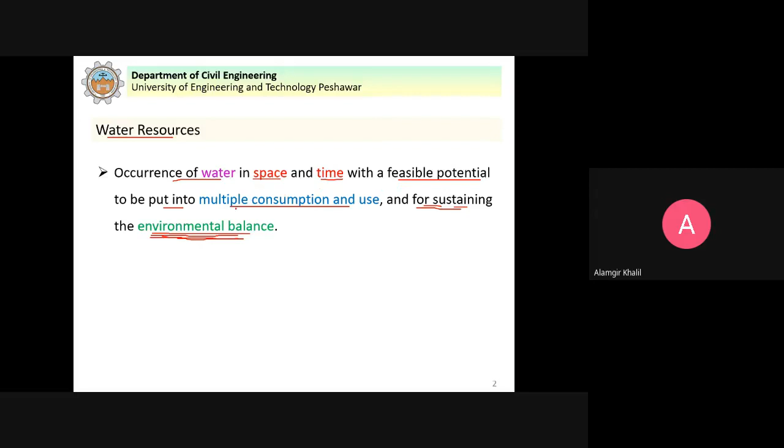So water occurs in space and time with a feasible potential to be put into multiple consumption and use, and for sustaining the environmental balance.

Water is a single resource, as you can see that it is abundantly available on the surface of Earth. It has no substitute.

Water is a limited resource. Here we talk about the freshwater availability, because we have plenty of water available in oceans, but we cannot use them. For example, directly we cannot use them for drinking purposes because of the salts present in it. So we are more dependent on water in lakes or in rivers. So water is a limited resource.

Accessibility - how many people have access to fresh water? As you already know, civilizations have nourished along the banks of rivers, because water is life and we are using water for different purposes. So if we do not have a direct source of water available, then we have to bring the water from a source to the community.

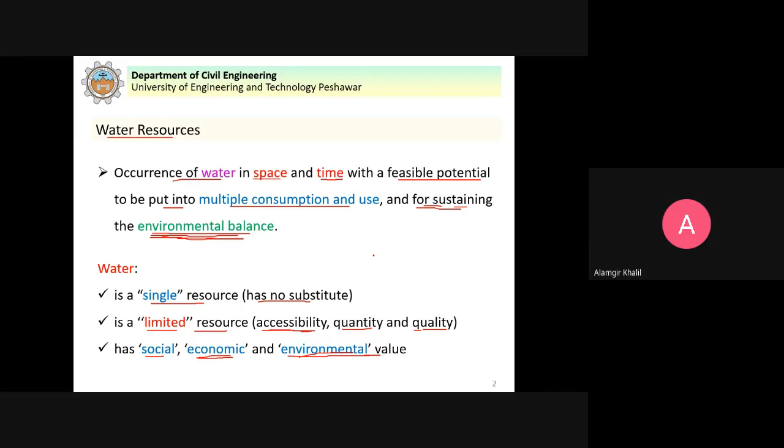A unique resource: every organism, individual, and ecosystem on the planet depends on water for survival. Water impacts all aspects of life on the planet.

Poor water management and water shortages can lead to disease. If we have water shortages, definitely we cannot survive without water. Or if we have poor water management, for example, water stays in an area, it can lead to causing diseases because it will become a breeding place for flies and mosquitoes.

Similarly, if we have water shortages, it can result into malnutrition - not sufficient diet that is necessary for health will be available, because if we have water shortage, we cannot grow more crops and cannot meet the food requirements of the population. It can also result into reduced economic growth.

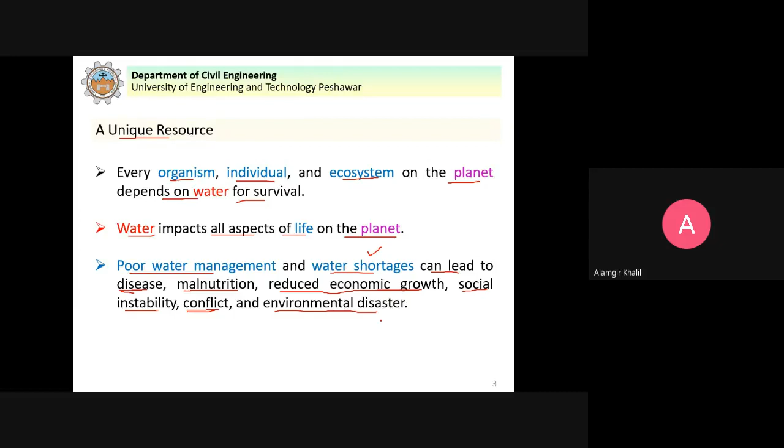Water resources - there are three resources of water. The first one is rain, which supplies water directly to any area on the surface of the earth. The second source is the surface water - the water flowing in rivers and the natural lakes that we have, or the dams and reservoirs that we build. That can be a source of surface water.

And we have groundwater. So the surface water occurs above the surface of the earth, and the groundwater occurs below the surface of the earth. But the groundwater is not directly available for use, we have to pump it in order to use the water. So it means we have three sources of water available to us: the rainfall that directly supplies water to any area, the surface water which is in the form of lakes and rivers, and the groundwater which occurs in aquifers below the surface of the earth.

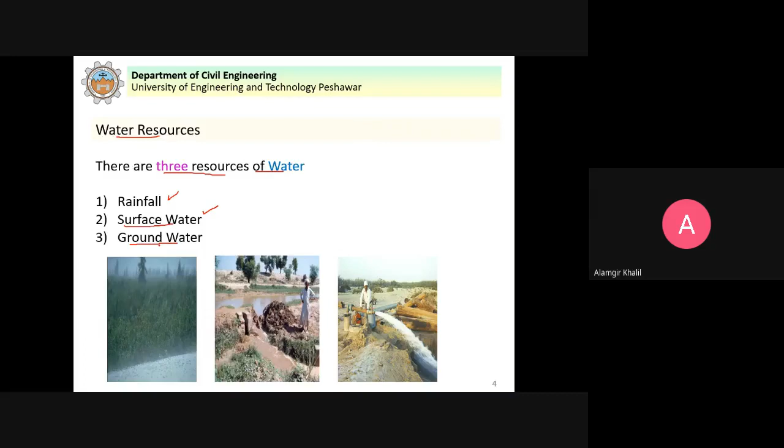Next, we have this hydrological cycle. You have studied this in detail in your hydrology course. So in the hydrological cycle, as you can see, the water moves in a cycle. This starts from the ocean, driven by energy from the sun. So we have evaporation, because oceans cover a great portion of the earth, and due to the energy from the sun, evaporation takes place.

And you already know that as the water vapor moves up, cooling takes place and it results in cloud formation, and then the clouds move inland, and the same clouds can result in rainfall, or we have precipitation. Precipitation is a general term that includes rainfall as well as snow on the mountains. Now this rainfall which occurs on the surface of the earth, some portion is absorbed by the plants and trees. So we have evapotranspiration - evaporation plus transpiration. Evaporation from the adjacent soil and transpiration from the plant leaves. Collectively this is known as evapotranspiration, and the water is again transported to the atmosphere.

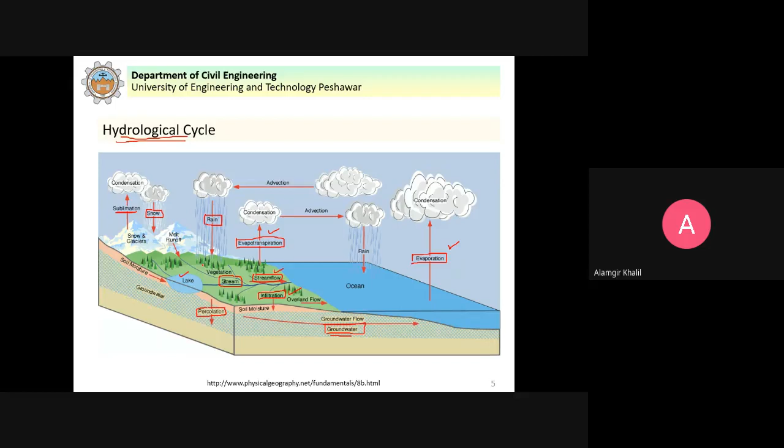When rainfall occurs over an area, how we can measure the rainfall. If any rainfall is missing, how we can determine the areal distribution, how we can calculate the missing rainfall in an area, and so on. So the hydrologic cycle is actually made up of a series of complex processes and storages.

Now the global view for occurrence of water: you can see that of the total global water, around 97% is in oceans. So 97% of the total water available on earth is in oceans, and we cannot use it directly for drinking purposes.

So out of that, the fresh water that is available is only 2.5% according to this source. This 2.5% fresh water is what we are dependent on for different uses: domestic water supply, industrial water supply, agriculture, food production, and hydropower generation. We are dependent on this fresh water, 2.5%.

And out of this 2.5% fresh water that is available to us, around 69% is in glaciers and 30% is below the surface of the earth. If we make this 2.5% as 100%, so out of that around 69% is in glaciers and 30% is groundwater. So we are left with just 1.2% of this fresh water available.

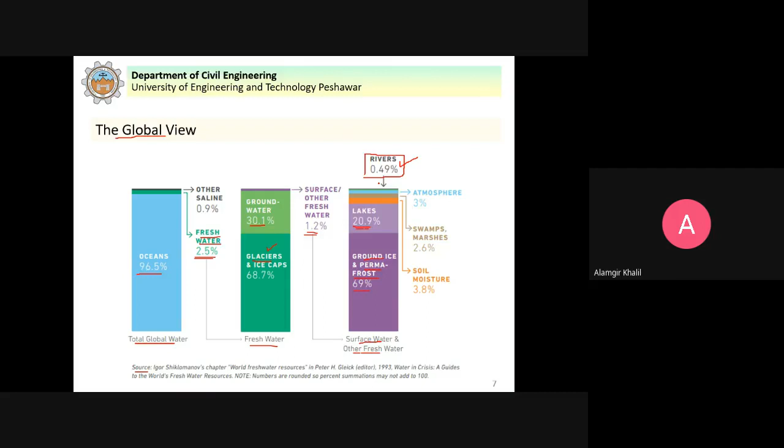So you can see the quantity of water that is available to us. The fresh water, 2.5% available. We have frozen, that is around 69%. Groundwater is around 31%. And the surface fresh water that is available is 1.2% according to this source. The figures can slightly vary depending on the different sources, but this is how you can visualize the availability of water.

So you can see how much water, that is actually the fresh water that is available to us for different uses. A greater portion is frozen ice, and around 31% is groundwater, which is not directly available—you have to pump it. So this is the water that is available to us in the form of soil moisture and the lakes and the rivers.

So you can see that the fresh water available to us is in the form of aquifers, rainfall, natural lakes, reservoirs, and rivers. Then we talk about the rivers in Pakistan, the Indus River, which is the lifeblood of agriculture, and agriculture is the backbone of the economy of Pakistan. You can see globally how much quantity of water is available to us in the rivers.

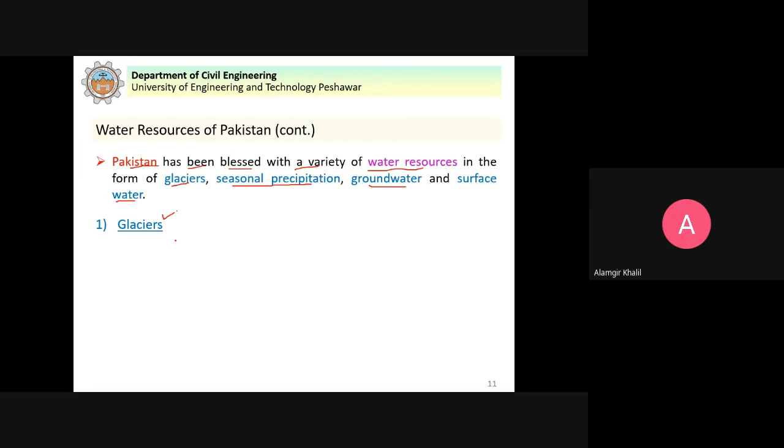So the glaciers here supply the water, the source of water for the Indus River and its tributaries. And the Indus River is very important in the context of Pakistan - the whole country actually depends on this Indus River and its tributaries.

The glaciers carry great significance in the flow volume and timing of the Indus River and its tributaries. Why do the glaciers carry great significance? Because during summertime, when temperatures are high, these glaciers melt, and that's why the rivers carry more water during the summertime. So you can see these glaciers have significance on the flow volume and timing. During summer, the flow volume is more in the Indus River and tributaries because of the melting of the glaciers due to high temperatures. But during wintertime, when temperatures are low, the glacier melting is slow, and that's why the flow volume is reduced in the Indus River.

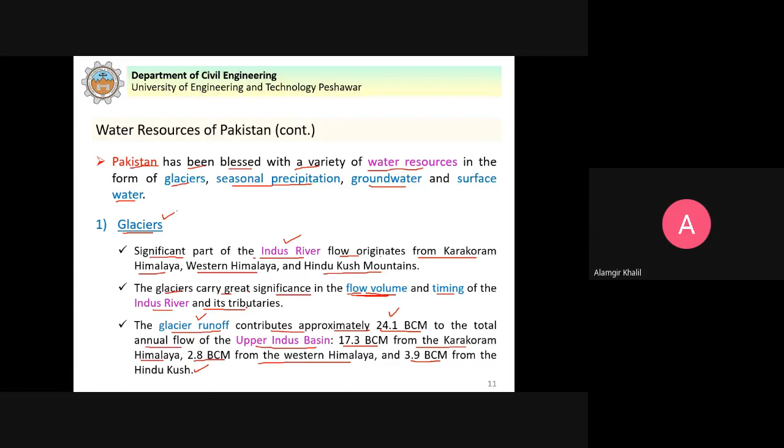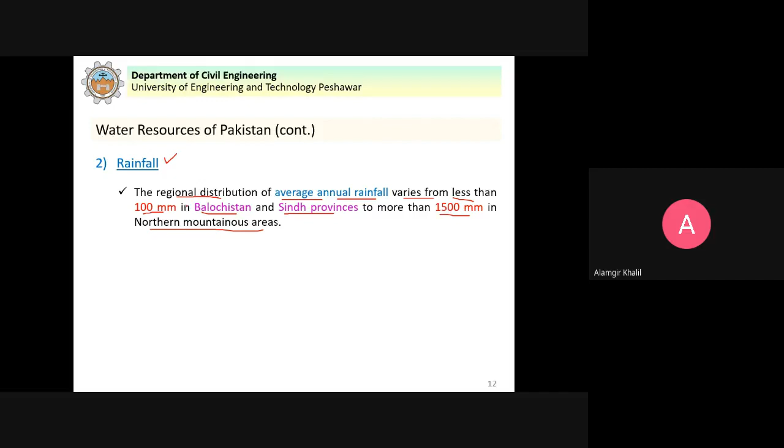About 70% of annual rainfall is received during the monsoon period, that is the months of July and August. So you can see that in Pakistan, 70% of the rainfall occurs during the monsoon period. So in other months, we have to use the water from the rivers or groundwater for different demands.

Now we talk about agriculture. During the Rabi season, which runs from October to March, the winter season, it is less than 50 millimeter in parts of Sindh and more than 500 millimeter in Khyber Pakhtunkhwa provinces. So it means that rainfall alone is not sufficient to grow crops.

This is the point to understand here, why we need irrigation. If we have enough rainfall over an area where we grow crops, and that rainfall also occurs at the required times when the crops need the water, in required quantity, then this rainfall alone would be sufficient for raising the crops. Then we don't need irrigation, we don't need artificial supply of water for growth of crops. So this is the reason why we need irrigation, and we have irrigation engineering.

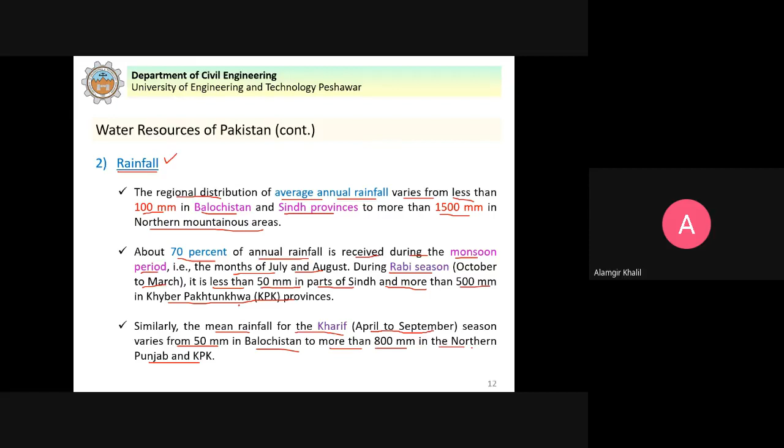The extreme changing pattern of rainfall results in large variations in flows during the Rabi and Kharif seasons. Because we grow different crops during the Rabi and Kharif season, during summer and winter season, you can see that because of the changing pattern of rainfall, we have large variations in flows during the two seasons.

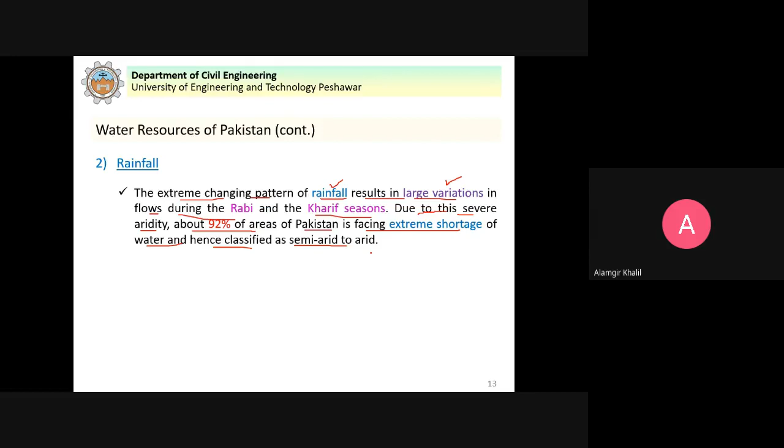Due to this severe aridity, about 92% of areas of Pakistan are facing extreme shortage of water and hence classified as semi-arid to arid. Arid land is where the rainfall is not sufficient to meet the evapotranspiration requirements. So you can see here that 92% of areas of Pakistan are classified as semi-arid to arid, meaning the rainfall, which is a source of water, is not sufficient to meet the crop water requirements alone.

About 16.5 billion cubic meter of rainwater contributes to crops in the Indus Basin irrigation system, which we will discuss in detail. This is only 13% of the average annual canal diversions. So it means that the water which we are diverting from the dams and from the rivers for crops, the rainfall that occurs in the Indus Basin irrigation system is only 13%. 13% of the crop water requirements can only be met by the rainfall.

So in order to produce more food for the population, we have to artificially supply water to the crops, and this is known as irrigation. This is why we have the need for irrigation. All these figures are from the book Applied Irrigation Engineering, published in 2017, so you can find updated figures about Pakistan.

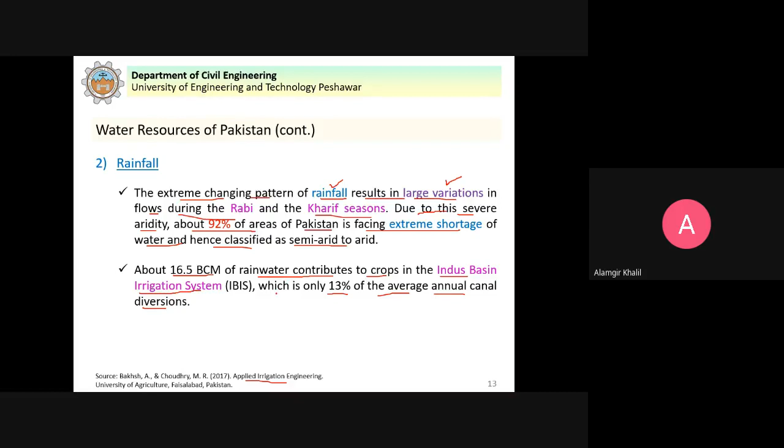The groundwater situation in Pakistan. Groundwater provides an alternative water resource for agriculture. Why? Because groundwater is not directly available if the water table is sufficiently below the root zone, so plants cannot extract water. So that is why we have to pump the groundwater to the surface and then supply it through channels to the crops.

And this is a very useful resource. It is estimated that around 33% of the world's population utilizes groundwater. So it means we cannot ignore the significance of this valuable resource.

Many countries such as Pakistan, India intensively exploit groundwater to supplement the canal water. It means that we are using groundwater as a source to supplement in addition to the canal water that we supply for agriculture.

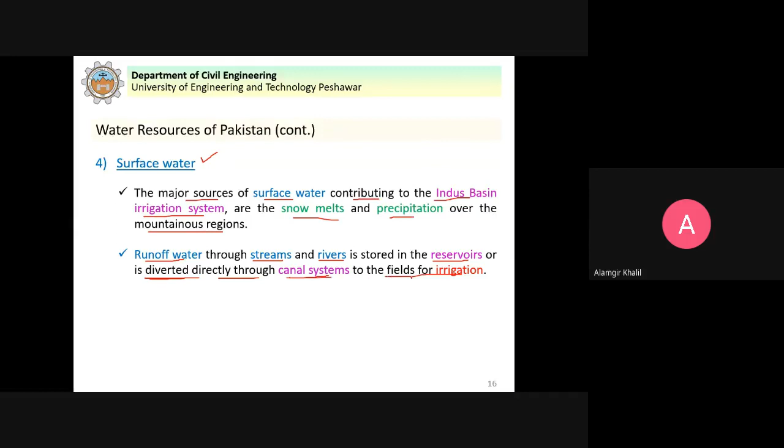Runoff water through streams and rivers is stored in the reservoirs or diverted directly through canal systems to the fields for irrigation. So this runoff water, which comes from the snow melt and precipitation over the mountainous regions through streams and rivers, is either stored in reservoirs, for example Tarbela Dam, Mangla Dam, or we have weirs and barrages that divert the water through canal systems to the agriculture fields for irrigation. Irrigation is the artificial supply of water for raising the crops.

The Indus Basin irrigation system is primarily comprised of 6 rivers, namely Indus, Jhelum, Chenab, Ravi, Sutlej, and Beas.

In Pakistan, however, the surface water resources, because of the Indus Water Treaty, which was signed in 1960 and is a water sharing treaty between India and Pakistan, Pakistan was limited to the water of the Indus, Jhelum, and Chenab rivers.

As you have already studied about the Indus Water Treaty, out of the 6 rivers, control of the 3 eastern rivers was given to India, and control of the 3 western rivers that include Indus, Jhelum, and Chenab was given to Pakistan.

So basically it means that even though we have the 6 rivers, mainly the Indus and its tributaries joining these, not all of the water in the river is available to meet their demands. That is why we have to supplement the surface water with groundwater.

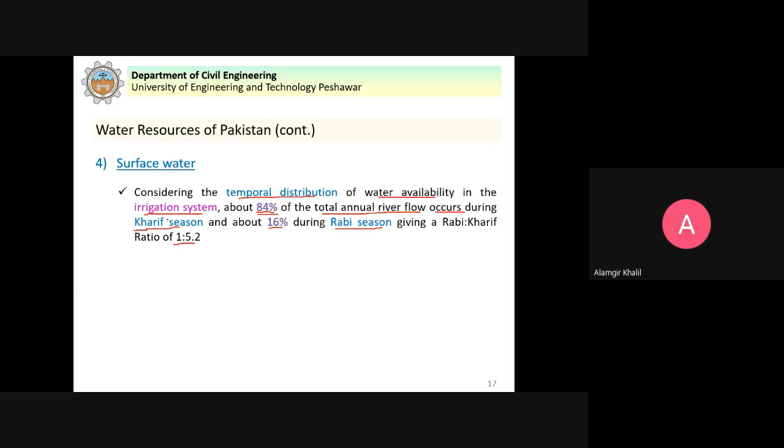So even if we have these rivers, still you can see that the temporal distribution is not equal. It means that more water is available during summer time, but less water is available during the Rabi season. So in winter, how do we meet the requirements of the crops?

So these are the reasons why we have to construct dams. In irrigation engineering, why do we study dams? So that you can store the excess water, and then the same water can be released during the Rabi season to meet the crop water requirements.

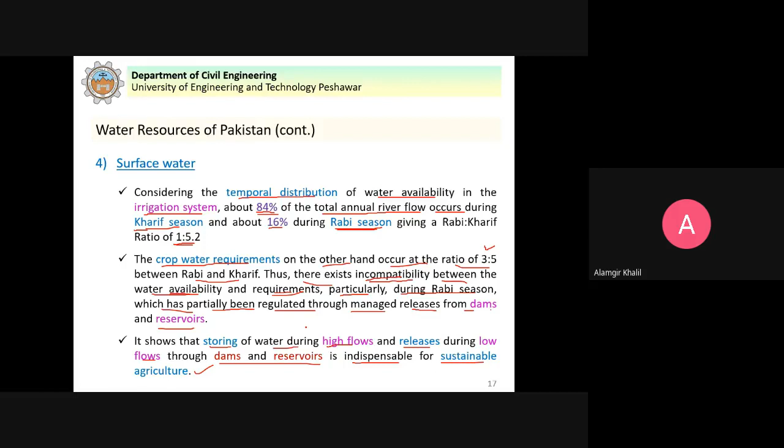And for this purpose, we have all this irrigation network, the irrigation system, and we have the Indus Basin irrigation system, which covers the entire country, a network of storages, canals, and other hydraulic structures. This is the reason why we study irrigation engineering.

Next, we briefly talk about the Indus Water Treaty. As you already know, the water which flows in these rivers flows through different countries, meaning these are transboundary rivers. So in Pakistan, we have transboundary rivers. For example, the rivers which flow into Pakistan actually originate in India.

And with the increase in population, we need more water to grow crops and more water for industries and water supply, drinking, cooking, washing purposes. Consequently, it will lead to conflict.

And this happened in our case, in the subcontinent. In 1948, India stopped the water from the rivers entering into Pakistan, and the two countries were on the verge of a water war. So after almost a decade of negotiations, finally a treaty was signed in 1960, known as the Indus Water Treaty.

This treaty gives India and Pakistan the rights to use the water of the 6 rivers. This is actually a water sharing treaty between the two countries. The Indus Water Treaty is a water distribution treaty between India and Pakistan.

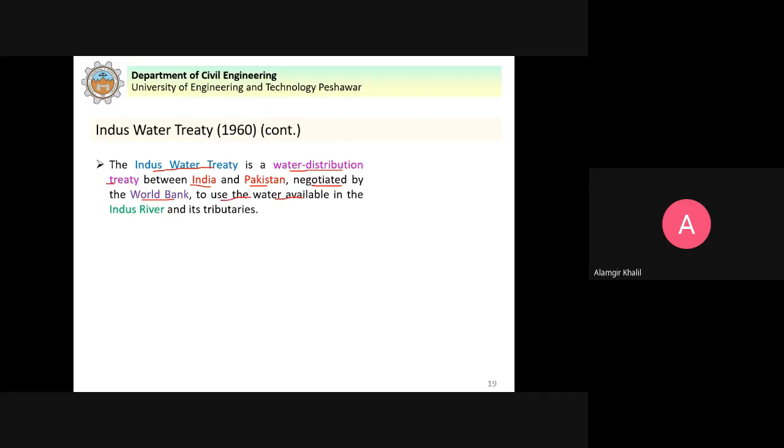Negotiated by the World Bank to use the water available in the Indus River and its tributaries, the Indus Water Treaty was signed in Karachi on September 19, 1960, by the Indian Prime Minister and the President of Pakistan. This treaty divided the use of the rivers between the two countries.

The treaty gives control over the waters of the three eastern rivers, that is the Beas, Ravi and Sutlej, to India, while control over the waters of the three western rivers, Indus, Chenab and Jhelum, to Pakistan.

So because India has to use extensively the water from these three eastern rivers, there was a threat to agriculture and other water demands in Pakistan.

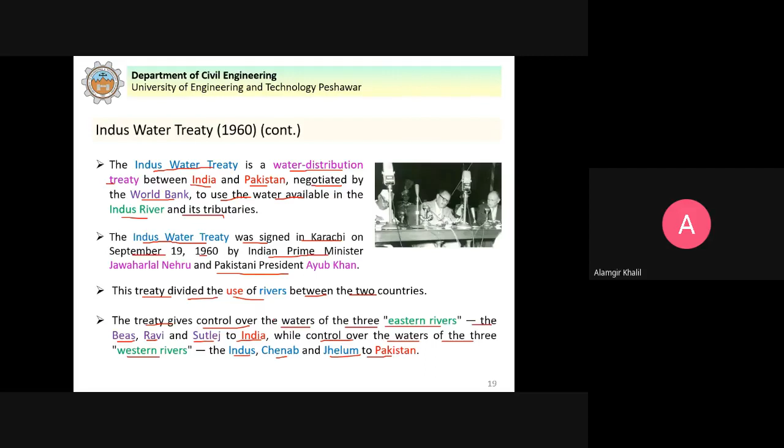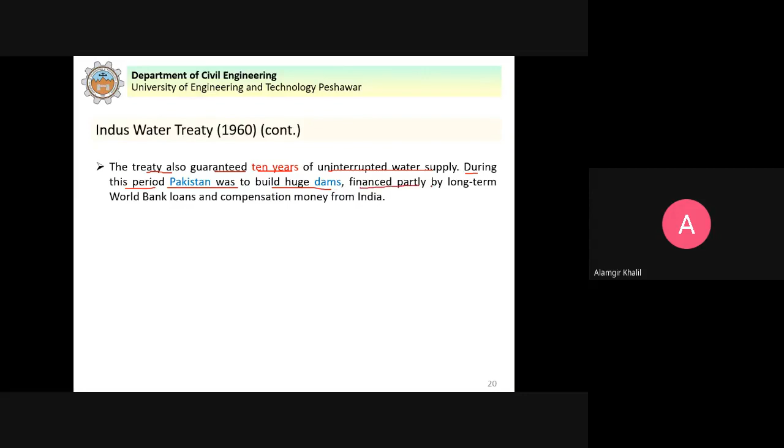So under this treaty, this also guaranteed 10 years of uninterrupted water supply. So Pakistan got 10 years to develop infrastructure to meet the shortages because of division of water usage between the two countries. During this period, Pakistan was to build huge dams, financed partly by the long-term World Bank loan and compensation money from India, because India has the full right to stop the water of the three eastern rivers.

So three multi-purpose dams, Warsak, Mangla and Tarbela, were built. A system of 8 link canals was also built, and the remodeling of existing canals was carried out.

So we have 8 link canals. Link canal means it is linking two rivers. For example, you want to divert the river water to another river, that is done through these link canals. Because India has full control over the water of some of the rivers, in order to compensate, we have these link canals that can supply water from one river to another if we need more water in the river to meet demands.

Five barrages and a gated siphon were also constructed under this treaty.

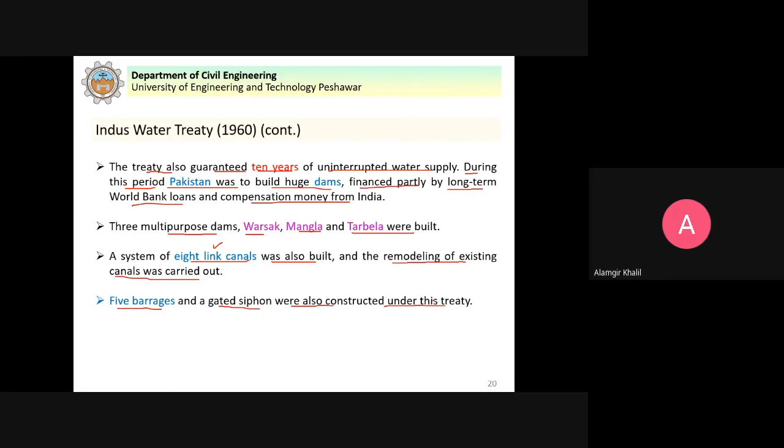The treaty allows India to use the western river waters for limited irrigation and unlimited non-consumptive use for such applications as power generation. So India has full control over the three eastern rivers, but the western rivers, which also originate from India, under the treaty India is allowed to build run-of-the-river hydropower projects.

You might have heard the names Kishanganga and Baglihar Dam. So these are actually run-of-the-river hydropower projects. These are allowed under this treaty because India is not storing the water here, these are run-of-the-river projects.

Just like we have the Ghazi Barotha hydropower project. It is a run-of-the-river project, basically a canal, a channel which runs from Ghazi to Barotha. And at Barotha, head is available, and we have 5 Francis turbines that can generate electricity of 1400 plus megawatt.

Just like this, under the treaty, India is allowed to build hydropower projects as long as the water downstream can continue to flow into Pakistan. Even though Pakistan has raised concerns over construction of these projects, so far we have not been successful in the International Court of Justice, because India is allowed to build hydropower projects under this treaty.

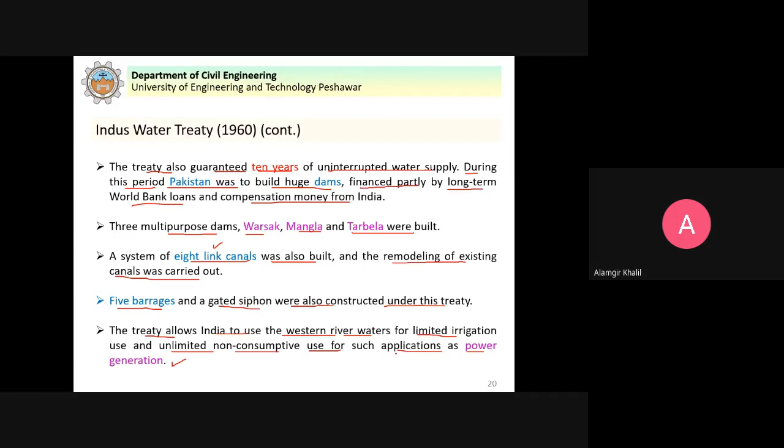Similarly, we have the Water Accord 1991. So we have the transboundary rivers between the different provinces. In Pakistan, as the water flows in the rivers, we have 4 provinces, and the provinces also raise concerns over the use of water. For example, the river flows from KPK and Punjab and then to Balochistan and Sindh, so definitely Sindh would like to get the required quantity of water to meet its demands.

So there was a conflict between the provinces of Pakistan over the sharing of available water. So in 1991, an accord was signed between the 4 provinces of Pakistan over mutual sharing of water usage, known as the Water Accord 1991, or the Water Apportionment Accord. Apportionment means taqseem, distribution - so this is known as the Water Apportionment Accord, signed between the 4 provinces in 1991.

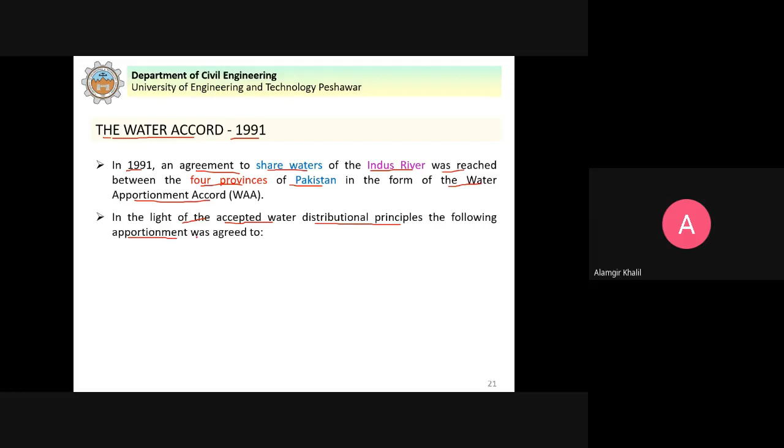So in light of the accepted water distributional principles, the following apportionment was agreed to. You can see here that out of the available total water, for Punjab during the Kharif season it's 37.07 million acre feet, and during the Rabi season 18.87 million acre feet, so a total of 55.94 million acre feet of available water to be used by Punjab.

Similarly for Sindh, and in Khyber Pakhtunkhwa you can see we have 2 figures. The reason here is that in Khyber Pakhtunkhwa we have civil canals. So it happens that some of the canals are maintained by the government, and some are maintained by the civil community, civil society - these are known as civil canals.

So this is the water distribution during the Kharif and Rabi seasons. And you can see for Balochistan, during the Kharif season 2.85 million acre feet, and during the Rabi season 1.02 million acre feet. So under this water accord, the 4 provinces agreed over this water distribution.

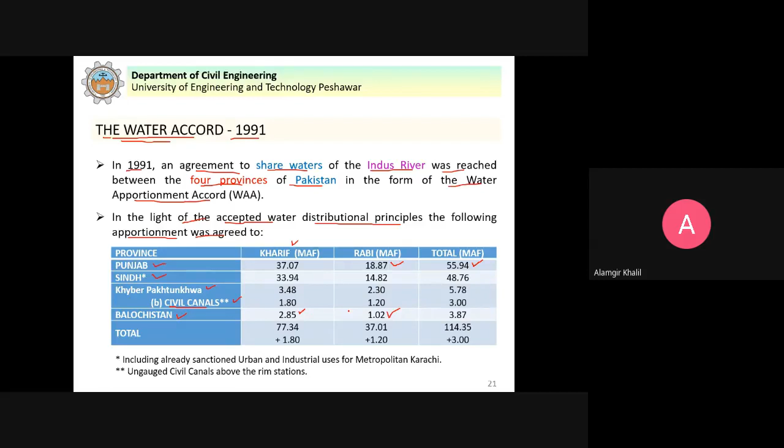Water use around the world - if we look at the global picture, globally for agriculture we are using 70% of water, 8% for domestic use, and 22% for industrial use. So globally, this is the situation regarding usage of water.

If we consider the high income countries, the developed countries, they are using 30% of water for agriculture, 59% for industries, and 11% for domestic uses. So in developed countries, only 30% of water is used for agriculture, and the reason is they use more efficient methods of irrigation, as I showed in some pictures at the start of this lecture. Whereas 59% of water is used for industrial use.

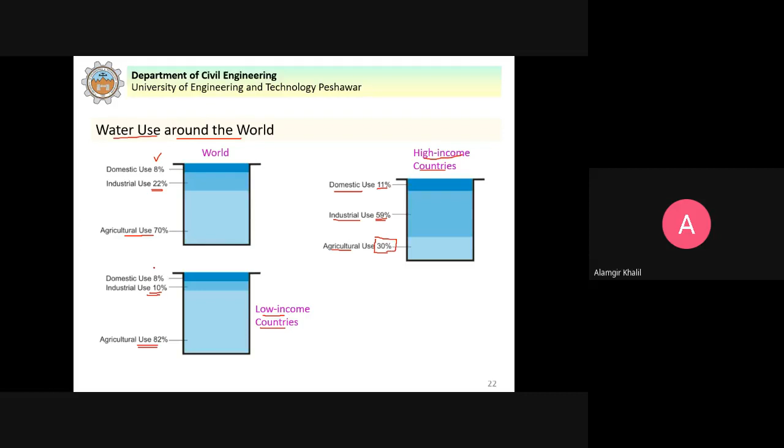But if we compare this with low income countries, the developing countries, we see they use 82% of water available for agriculture, because we have more population and need to grow more food. 10% of water is used for industries and 8% for domestic use. This is given in this source. So industrial use of water increases with country income, going from 10% for low and middle income countries to 59% for high income countries.

For example, in Pakistan, we are a developing country. Agriculture is the backbone of our economy, and you can see here the water we are using for agriculture.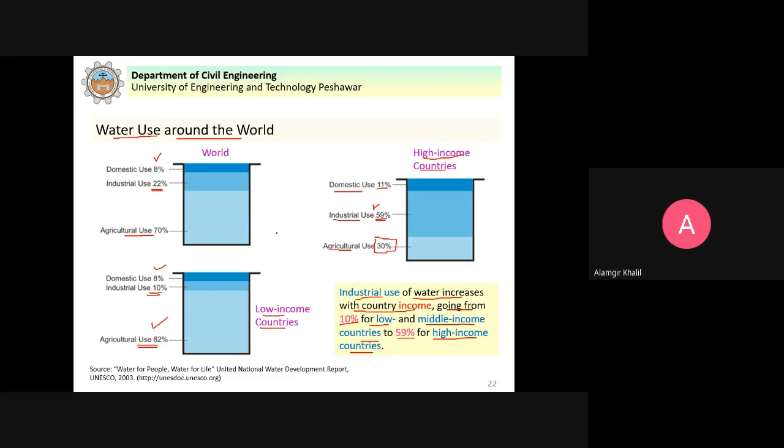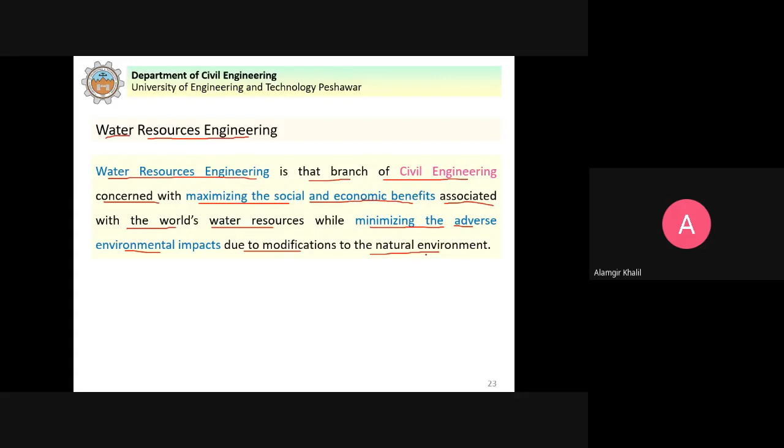This water resources engineering covers all aspects of what you studied: fluid mechanics, hydraulics, hydrology, irrigation engineering, groundwater hydrology, and so on. It is that branch of civil engineering which is concerned with maximizing the social and economic benefits associated with the world water resources.

What we mean by maximizing social and economic benefits: we use water for drinking, washing, and cooking purposes. As the population increases, we are exploring more resources of water to meet the demands. For economic benefits, we use the same water for agriculture to grow crops, and for hydropower production - we construct dams and generate electricity by utilizing the head of water available, which results in economic benefits.

So on one side we are maximizing the social and economic benefits, but on the other side we are minimizing the adverse environmental impacts due to modifications to the natural environment. When we construct canals and hydraulic structures, we bring modification to the natural environment. Tarbela Dam, for example, is the largest earth and rock-filled dam in the world, and we are modifying the natural landscape of the area.